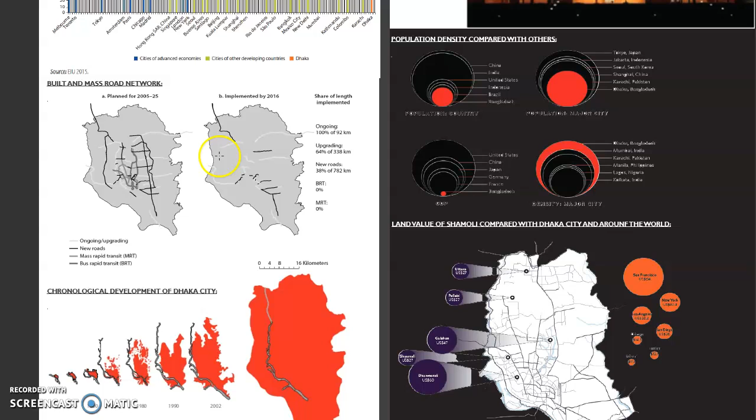This is the mass road network development. Most areas in my city are undergoing development, and in terms of population density, Dhaka has the highest density compared to others like China, Japan, India, Indonesia, USA, Brazil, and many more.

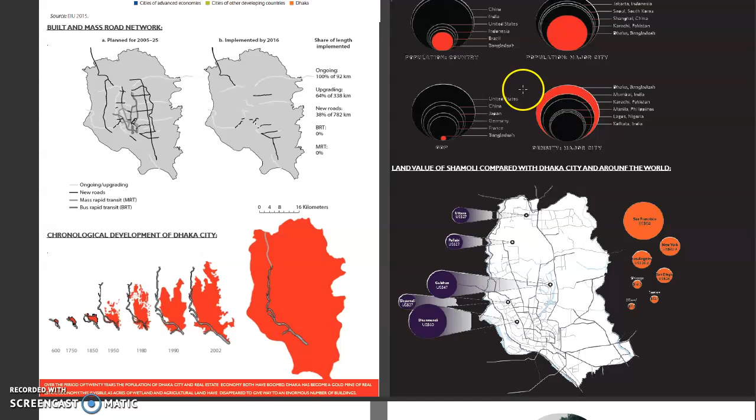This is the chronological development of how it looks nowadays. In just the last 20 years, it has boomed.

This is the land value, madam. Here is my site, Shamoli. It shows the lowest value, like that.

So, research and site analysis. Here I try to do something with the site.

Including the city, flood issues - flash flooding is the most common thing in the city, because when heavy rains occur, most of the major roads are just full of water. People get stuck, they can't move anywhere, and there's no vehicle on the road.

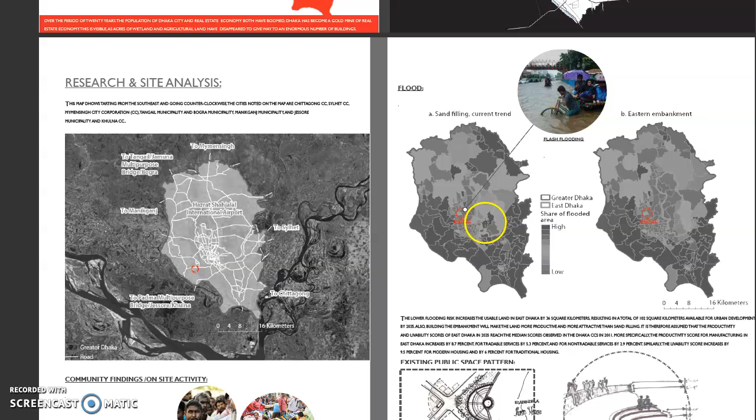It's a terrible experience for the city people near Shamoli, just near my site. Sometimes this road also looks like that in rainy season.

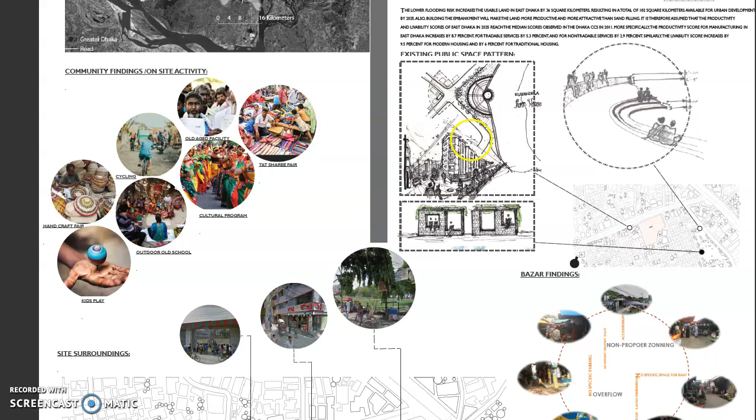The public space pattern - how it looks. I just try to do some sketches which are near my site.

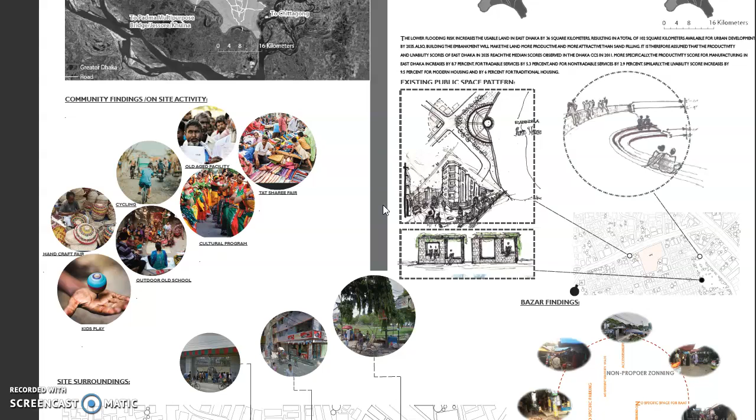How it looks, how people would like to sit outside, how people would like to enjoy the taste of the place.

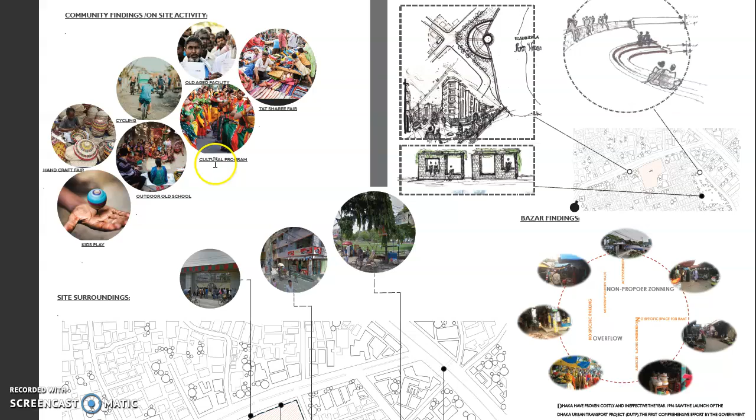The community findings and the site activity. Here I try to figure out some activities which are happening on my site, so that I can easily make a good program for my project.

At the site and site surroundings, there is a mosque just near my site, and there is a big park. This park is now going to be developed as a playing field, and this field is just near the site. There is a proposal to do something like a park or recreational space, which is what I am thinking about as well.

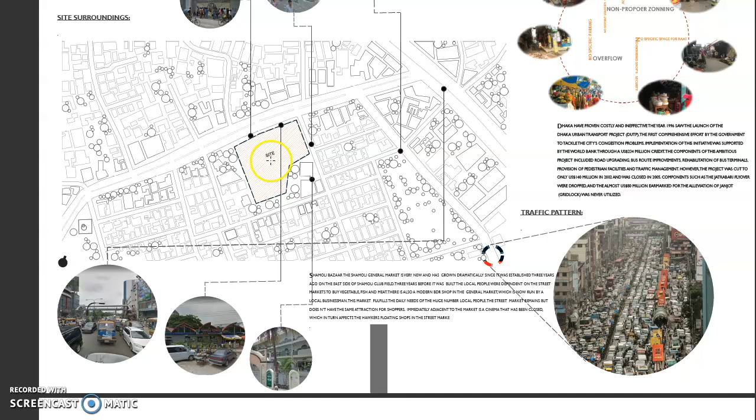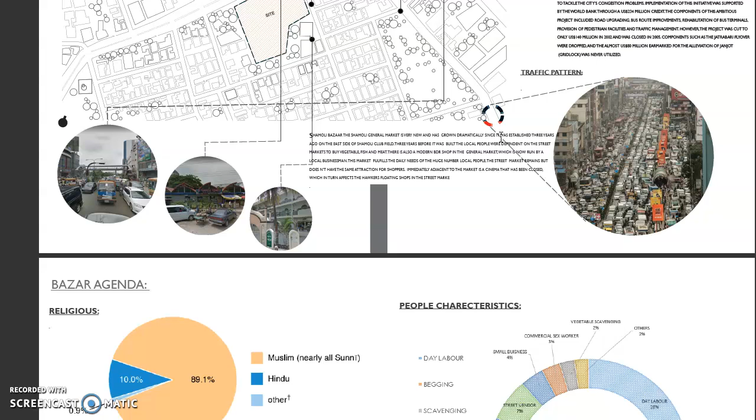Here is the traffic pattern. As I said earlier, Dhaka is the busiest city, so sometimes we find the traffic looks like that, with all the vehicles stuck. It's a terrible experience as well.

Here's the Bazar agenda.

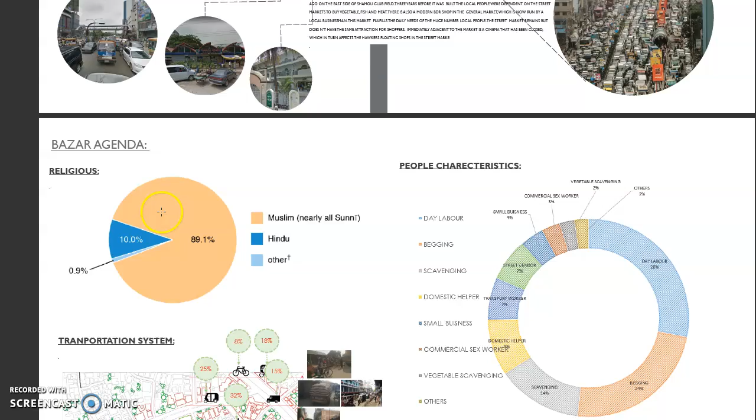If we see the people characteristics, there are a lot of characteristics, mostly daily laborers. More than 28% are daily laborers, so they're earning money on a daily basis.

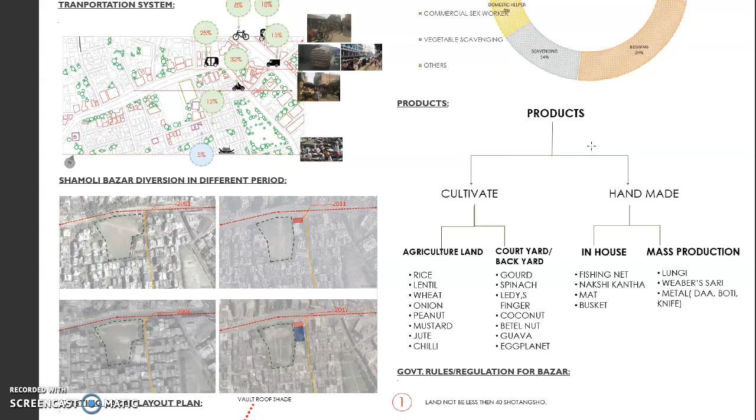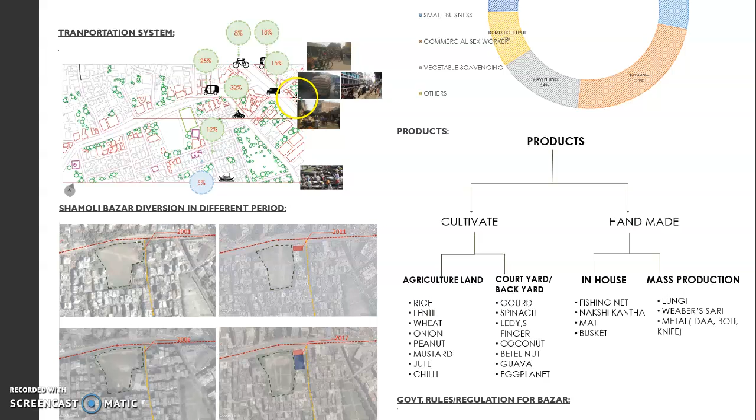Here's the transportation system, different kinds of transportation including the Bazar, and how it looks like, this kind of transport they use more.

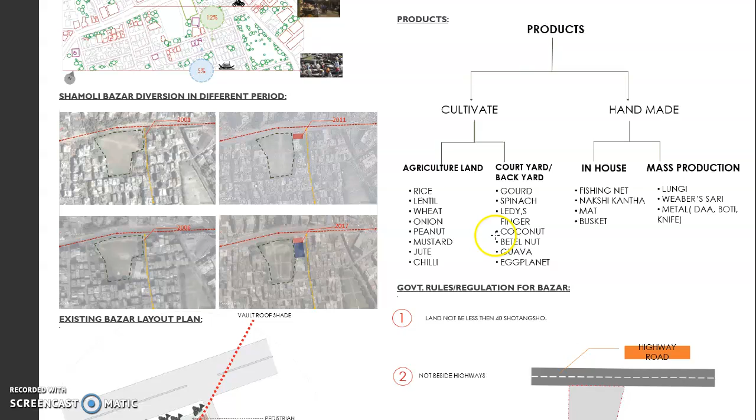Here the products, I just try to figure out the products from the Bazar, how many types of products come out from there, so that I can work on my design with those things.

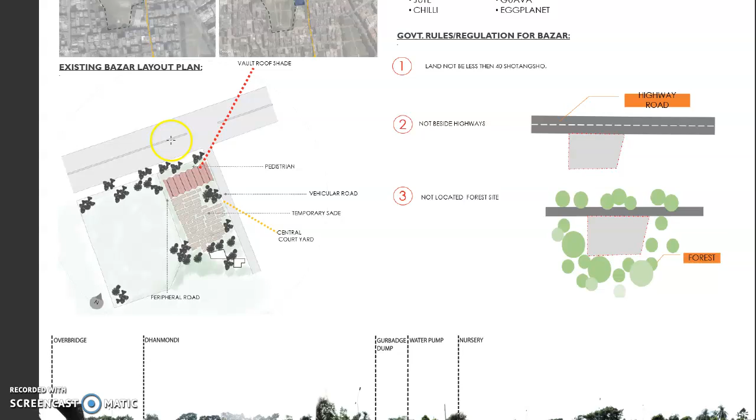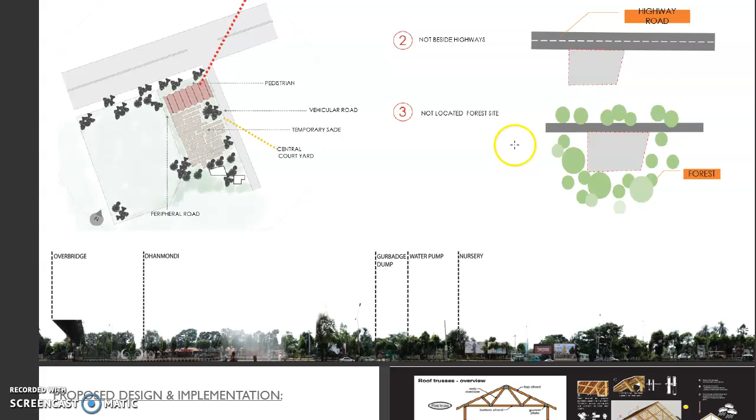Here's the existing layout, Bazar layout plan, how it looks like - the pedestrian, temporary shade, vehicle access, and the courtyard characteristics, all those things. We have some government restrictions on the Bazar, so we must follow those things when we do something in the real field.

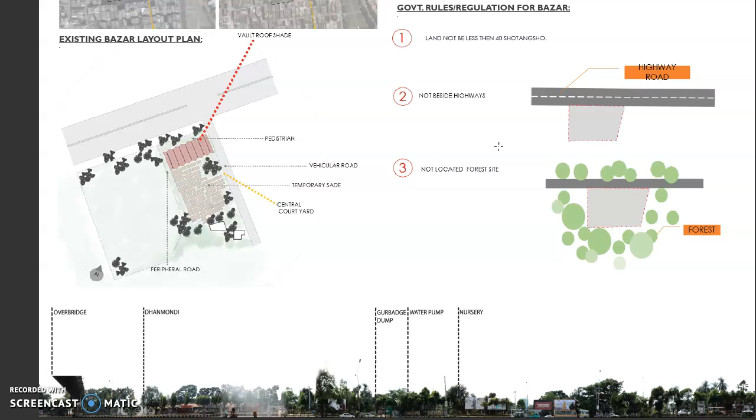One thing I tried to do strongly is the courtyard concept, which is very contextual in my country. Most of the time in public space, people would like to sit outside. They enjoy more outside than indoor space because they would like to stay with nature, the open air space, or something like that. That's why that was the key thing I thought from the beginning of my design - to make a relationship between indoor, outdoor, and semi-outdoor space as well.

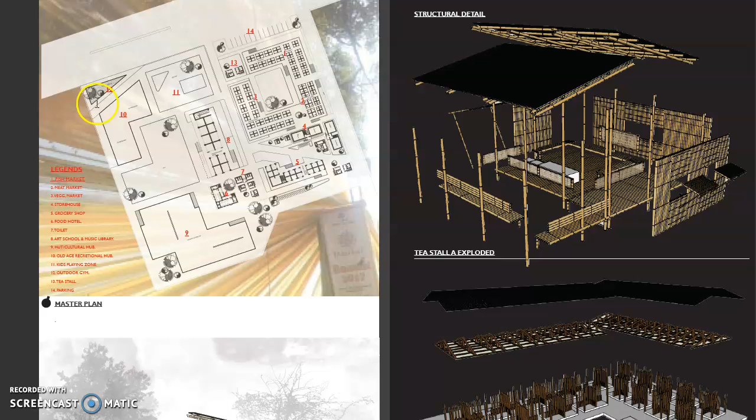Here I just tried to work on the elevation section drawings as well. This is the fish market elevation, what I'm thinking how it's going to look in my design. This is the storehouse elevation.

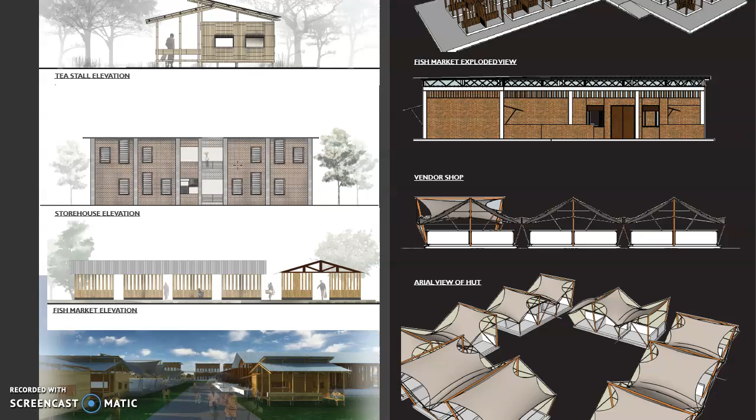I mostly focus on local material as I'm thinking of the context, because wood and bamboo are the cheapest materials, and in the hut, whatever vendors can afford easily, what I'm going to provide them, they can get it, they can see it, they can sell their products, and they're paying a little amount of money for their shops. So after all, I am thinking it's going to make things convenient.

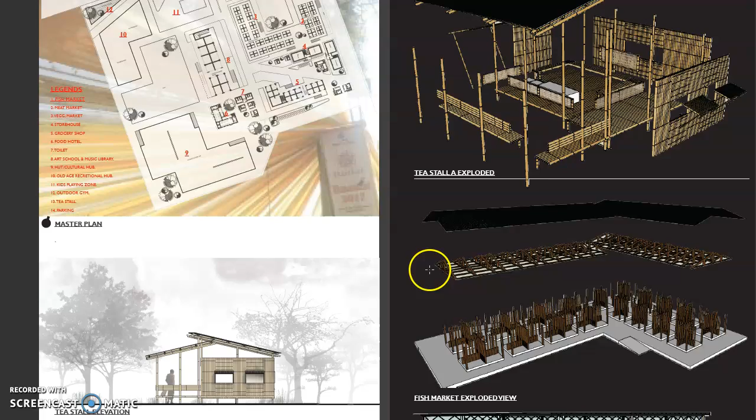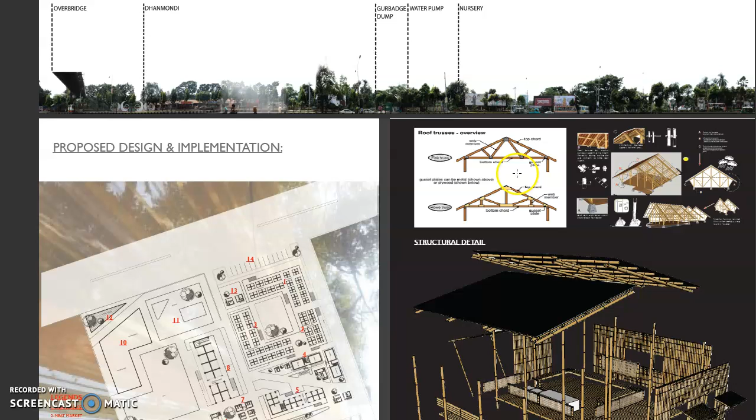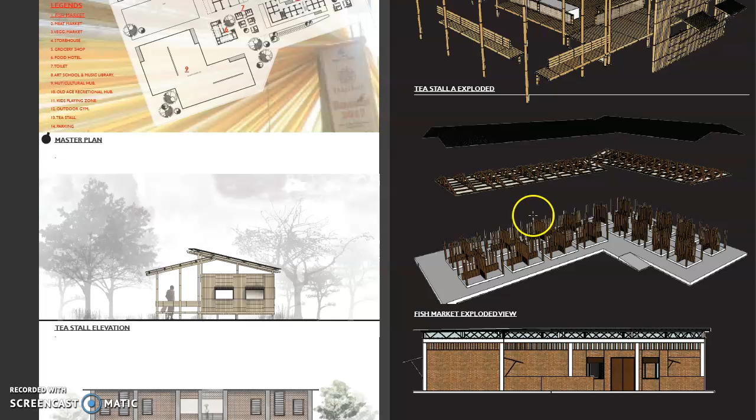So here I also try to do some structural things - how, when I'm going to work on local materials, it's a big challenge for me, how all those things are happening. I provide an exploded drawing of that over there, and the exploded drawing of the fish market here, and some vendors, how it looks like in elevations, and this is the hut aerial view how it looks like.

Here I also try to implement the courtyard concept, as I said earlier, like people would like to gather outside mostly. So when they're going through busy on a hot day, a lot of people are coming, so when they can get an open air space, they can walk, they can roam around the hut, and they can buy something. I'm just trying to make sure of proper circulation and space quality as well.

So that's all my presentation.